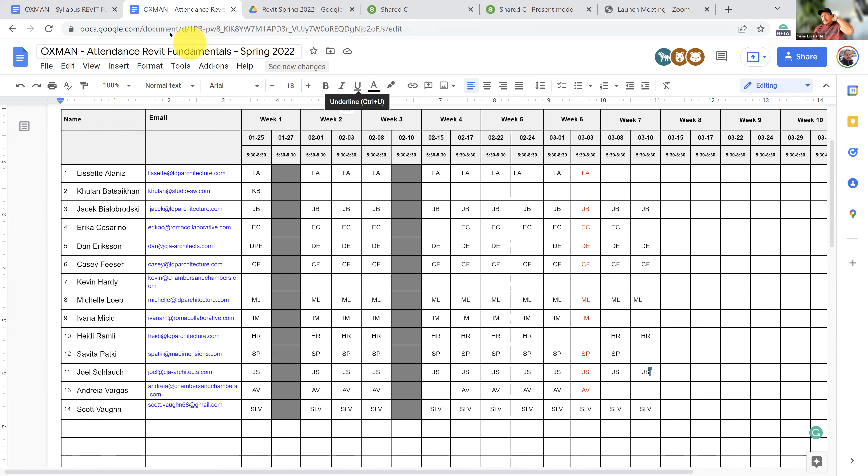So last class, we looked at shared coordinates, a very detailed discussion on shared coordinates. Today, I'm a little behind schedule, but we're going to cover parameter schedules, rooms, and color schemes. Next class, I'm going to try to catch up quickly, because working with CAD export interoperability is going to go very, very fast. And I think on the drafting view, we already covered some of this.

The class I recommend not to miss is phasing and design options. This is a good topic, in particular when we're trying to structure renovation projects, which I assume a lot of you do at your practice. And sheet and detail management is more about BIM management, things to be aware of when working with consultants or with owners that demand BIM, and some of the contractual requirements of drawing deliverables and organization.

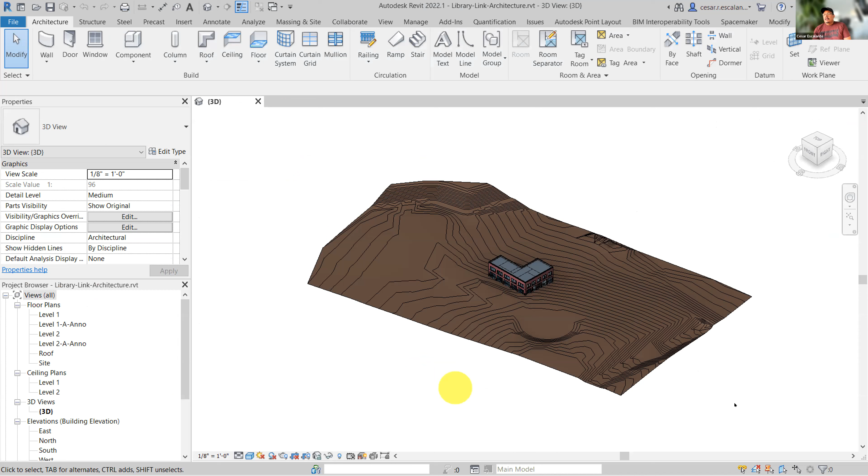All right, so for today, I'll do a little recap of the shared coordinates, and then we're going to jump into a quick test. This is where we left the last class. We were able to establish shared coordinates with a site. Just to remind the process: shared coordinates is a setup that happens once in the life cycle of a project. Usually the BIM manager helps start this process before a project kicks in.

The process is made of 4 steps. We discuss with Civil to determine the shared coordinate system, and we align the survey point to a point agreed with Civil, usually an intersection of a road or the corner of a boundary, some property lines. Then we can derive a topography. We create a topography based on a CAD file. There was an extra topic there.

Then we link this source into all the consultant files. And then the linked file is moved, rotated and aligned to your project. You never move your project to the link location. You move the link to your project. And then we acquire shared coordinates. And that's where we ended up last time.

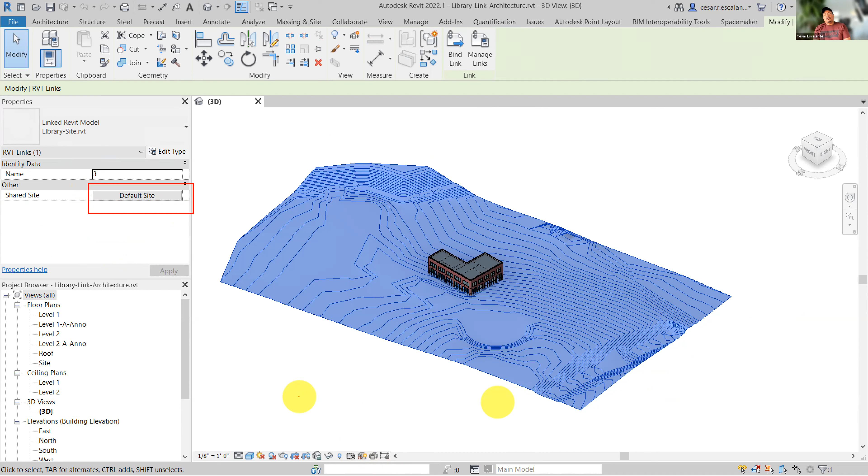Okay, so when shared coordinates are established, I could remove this link. Say, for example, you have a landscape architect or a civil architect, and they're sending you a new copy of the civil information. Then all you need to do is to reload the link using shared coordinates. So you don't have to do this, but let's pretend that Civil sent an updated civil drawing, or the landscape sent us an updated landscape model. All we need to do moving forward is to relink the file.

I'm going to add that. Oh gosh, where was it? I think I was using the D drive. Shared coordinates. Site's not here. Let me find it.

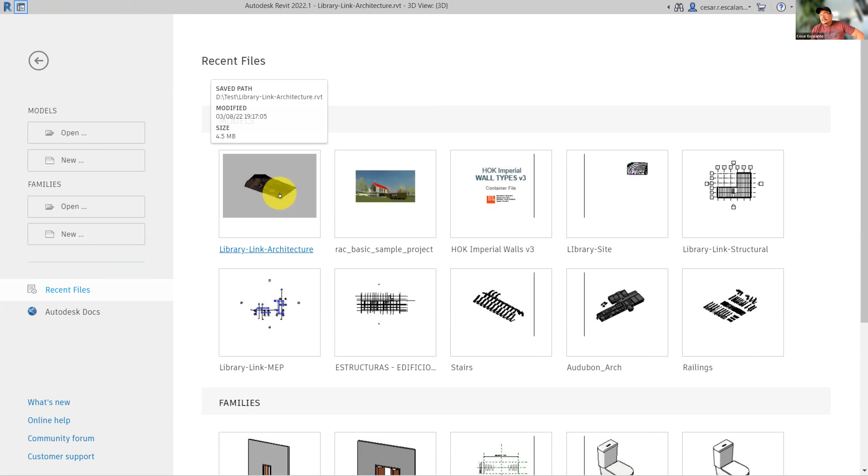This is a quick tip. If you want to know where the last file you were, you just switch to the welcome screen and hover over a file. It will take you where it is. It was under D test. You hover over and it will disclose the path for you.

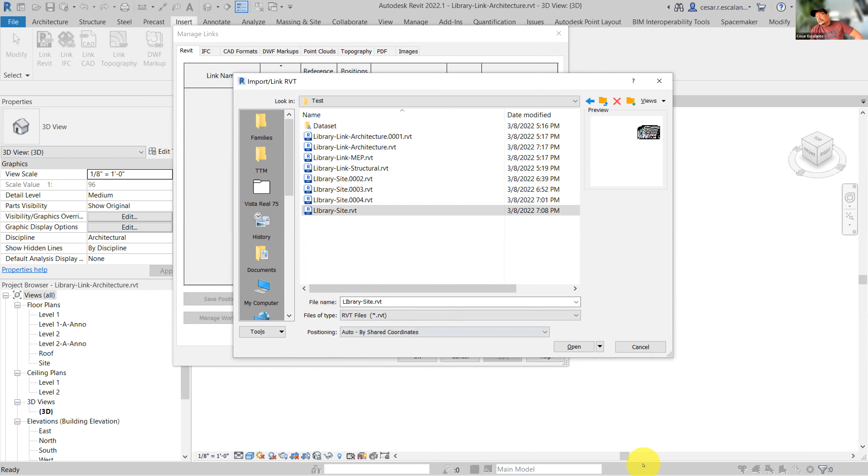Okay, so if I want to reload a new version of the link, you just go under Manage Links, Add, and I'm going to go to D test. Here is the site. And from this point forward, you always use By Shared Coordinates because the shared coordinates are already established. And so hit OK. And this should fall exactly in the same spot. Moving forward, these two files will be aligned and they will not shift unless somebody manually does that.

I would recommend you to pin every link so that it doesn't get moved by mistake. When you pin something, the link cannot be dragged out. If a model with established shared coordinates is dragged out, check what happens. If you were in the middle of modeling and suddenly you by mistake drag a link, and this link has established shared coordinates, you're going to receive this message.

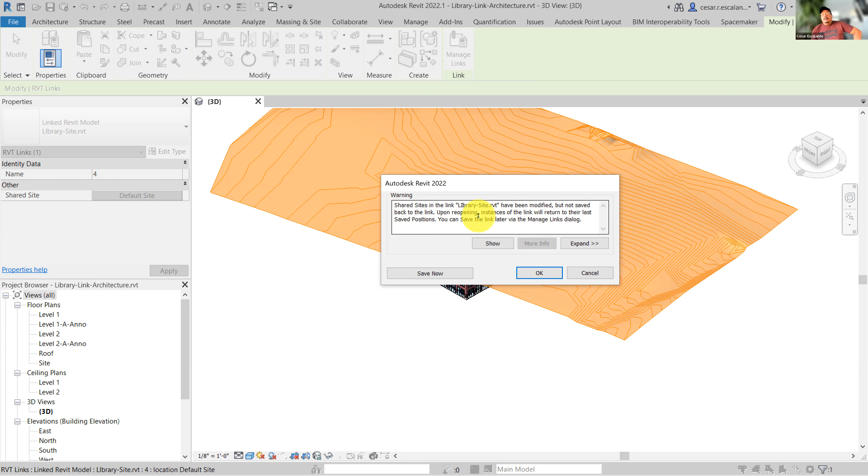It's a warning saying that the shared sites, which means the shared coordinates of the library, have been modified but have not been saved back to the link. Upon reopening, instances of the link will return to the last saved positions. You can save the link later via the Manage Links dialog. This warning is really a bad warning, because what Revit is telling you is that right now there is an uncoordinated location of shared coordinates, and Revit is attempting to alleviate this coordination.

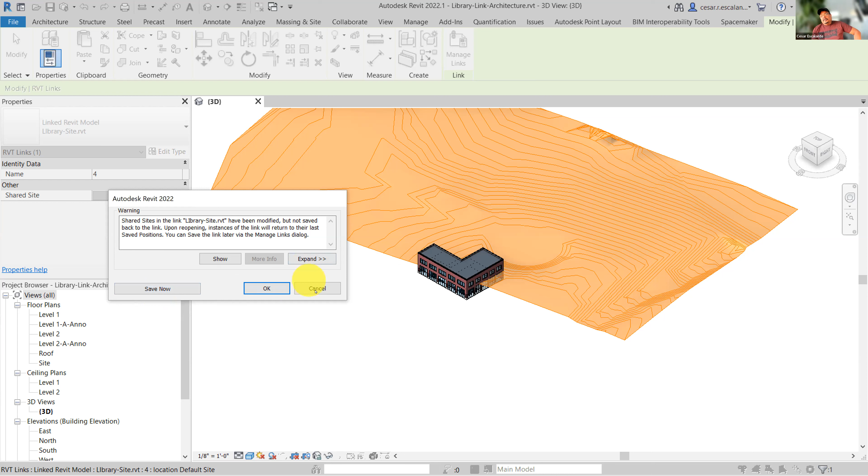And so if you're presented with this dialog box and you click Save Now, what you're actually doing is publishing the architectural shared point into the link, and modifying the link location. So I think this is the only dialog box where saving is bad. If you save here, we will be modifying the location of the shared coordinate system in the link, and that's not a good practice. That's gonna mess up the shared coordinates. So if you ever come across this message, always hit cancel. Cancel is gonna return the link to the coordinated place.

Now, to avoid that message appearing, just pin the link and then no one will be able to change or move the link inadvertently.

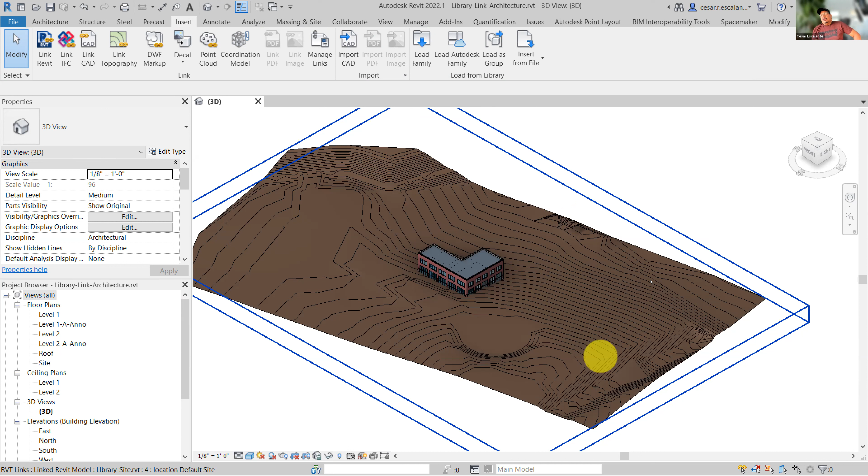Then the next step is to link this model into structural, establish shared coordinates, and repeat the process. Then you do that with every discipline, and you will be able to cross-link discipline with discipline using shared coordinates. After the structural establishes shared coordinates with the site, you can link the structural and the architectural using shared coordinates. And the whole system should be using the same thing.

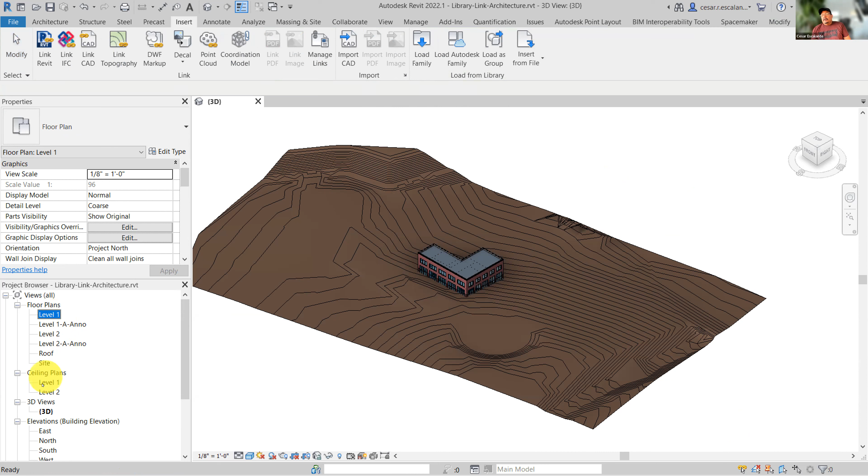The shared coordinates must be documented in the project execution plan. It's one of those pieces of information that must be disclosed and shared in one of the chapters of the execution plan. Usually what you want to capture is where the shared coordinate sits, in this case here, and what is the value of the project base point.

The project base point typically sits at the intersection of a grid, and it's usually the one that holds the elevation, an alternate coordinate for the elevation. So the last thing I'm going to do is move the project base point to an intersection, and that should do it.

Yesterday, who asked me? I think it was Dan, or it might be you, Joel, asked me, how do we relocate a project? Like if we needed to move an entire building by a certain distance because, I don't know, maybe it's overlapping a setback or on top of a property boundary, then the way to do this is using Relocate Project.

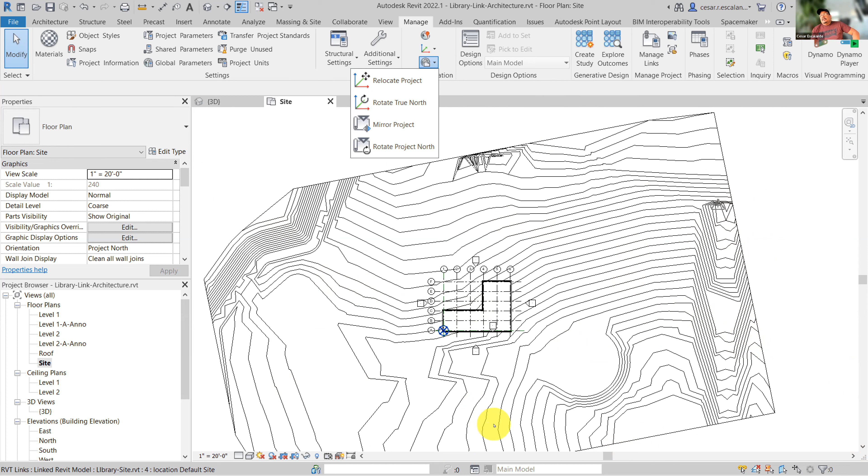So Relocate Project shifts the entire world except the links with shared coordinates. Everything, the elevations, the views, the 3D model, the project base point, the insertion point, everything moves except the shared coordinate point and links that have shared coordinates. So if I need to relocate this by a certain distance, you go to the Manage tab, then go to the Position drop-down list, and there's a button called Relocate Project.

You select a handle. This is where you move the building from, and then you select a destination point. So if I need to move the whole thing 5 feet, I'll do that. And notice that everything moved except the link file. I'm going to do it again, but maybe I'll do it more.

So again, I go to Relocate Project. You pick a source point, a destination point, and notice how the link remains in the back. Everything that has shared coordinates will remain where it is. And this operation of relocating a project needs to be done by every consultant so that we don't miss an alignment there.

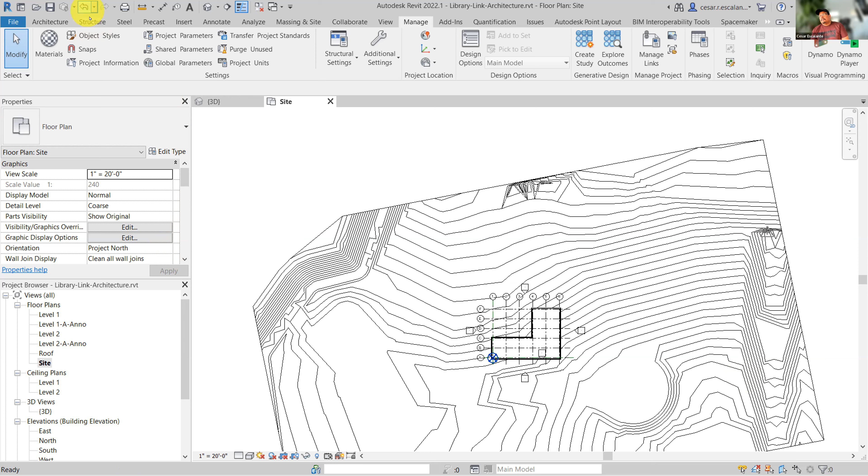Okay. So that is it for shared coordinates. Any question about this? Okay, so I'm going to close this file.

And it's time to do a little test. All right, you know how to do this. You go to slido.com and enter the number 509857. This is all a shared coordinates test. So if you paid attention in the last class, everything should be straightforward. All right, we're ready. Now launch question 1. You have 7 people on the test. Nine. All right, I think we all are here.

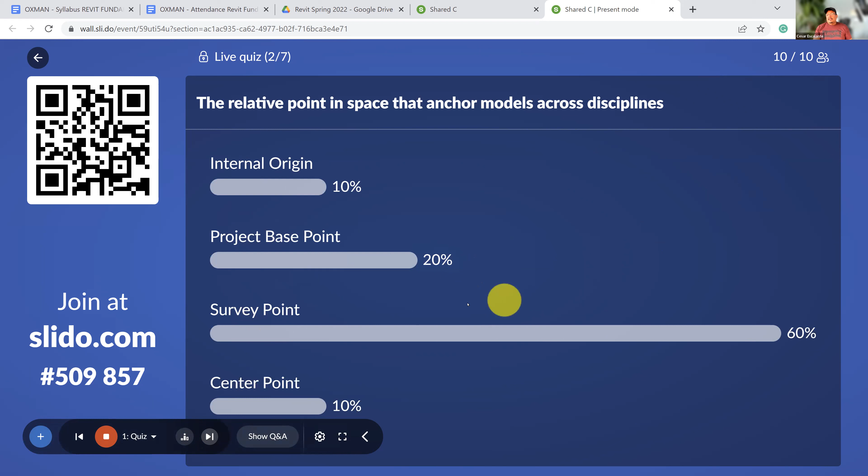The survey point, which has the shape of a triangle, is the point that establishes shared coordinates, and is the point that anchors models across disciplines. Project base point is just a secondary coordinate system. Center point is the geometrical center. All right. Casey got this correct. Good job, Casey, Erika, and Michelle.

All right, next question. It's all about the points. A relative point that allows levels to report a different elevation. Is it the internal origin? Is it the project base point, the survey point, or the center point? So remember, levels can report elevations relative to the ground level or elevations relative to sea level. So there's one point that enables us to do that.

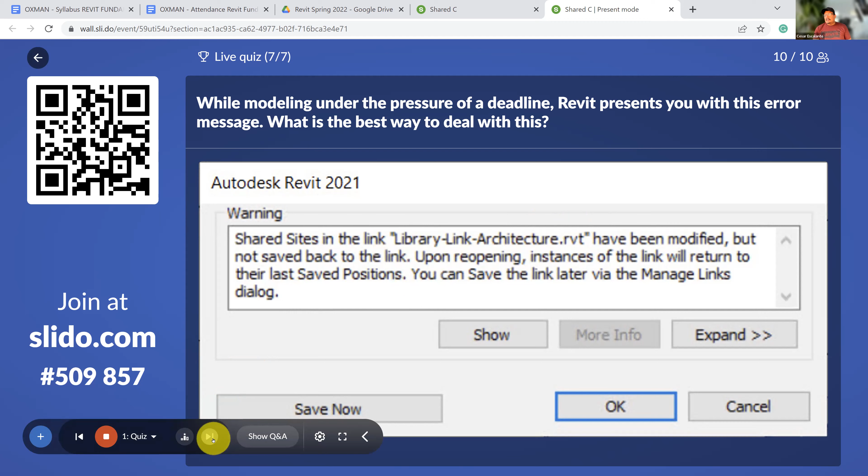Okay. Yes, everybody except one person got it correct. We always hit cancel because if we click save now, we're going to be publishing the shared coordinates into the link file, and that's a no-no. If you hit OK, you're basically ignoring it. But then when you click save, the same message is gonna pop up, so you're not addressing the issue. Every time you synchronize with Central, this message will be popping up again.

Okay, so the winner of this challenge is Ivana. Do I get a prize? Yes, so you did 6 of 7. And this was the hardest question in the test. I don't know what it says here. Oh, here. The point in Revit that indicates the center of space. Yeah, that was tricky because I mentioned the center and everybody picked center point.

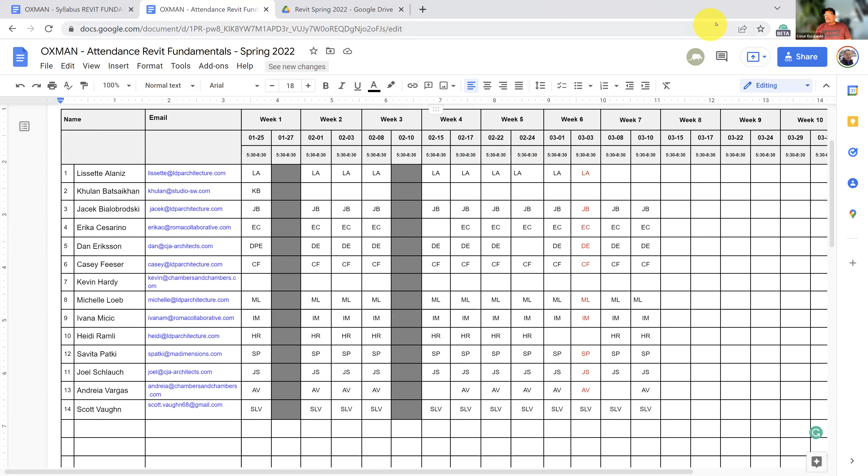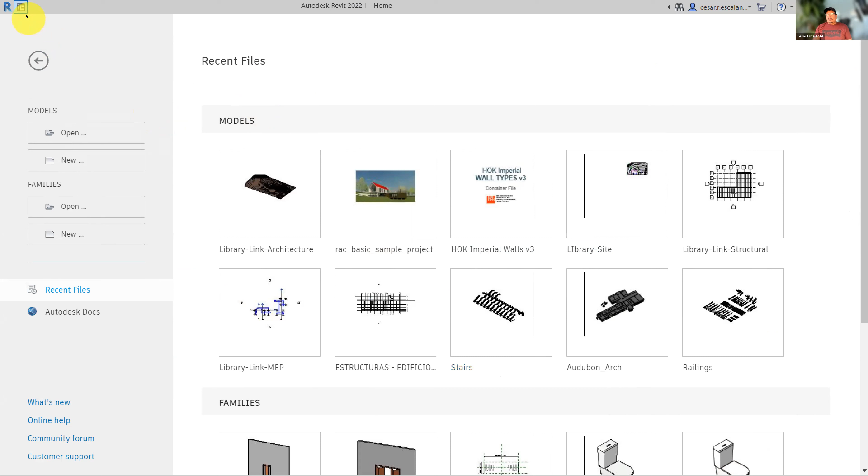All right, so we're going to talk about parameters and shared parameters. And for that, I'm going to open an out-of-the-box file. I know a couple of you have issues with this sample content, but let's see if this file is on everybody's workstation. So hit the home button, which is the button next to the big R, and that displays the Revit UI.

The reason I'm doing this is because under the File tab, if you just hover over Open, don't click on Open, just hover to display the drop-down menu, and scroll down, you're gonna get to the sample files. Inside the sample files, you should find the RAC Advanced Sample Project. Don't pick the RST or the RME, that's Revit Structure and Revit MEP. What we want is the Revit Architecture Advanced Sample Project.

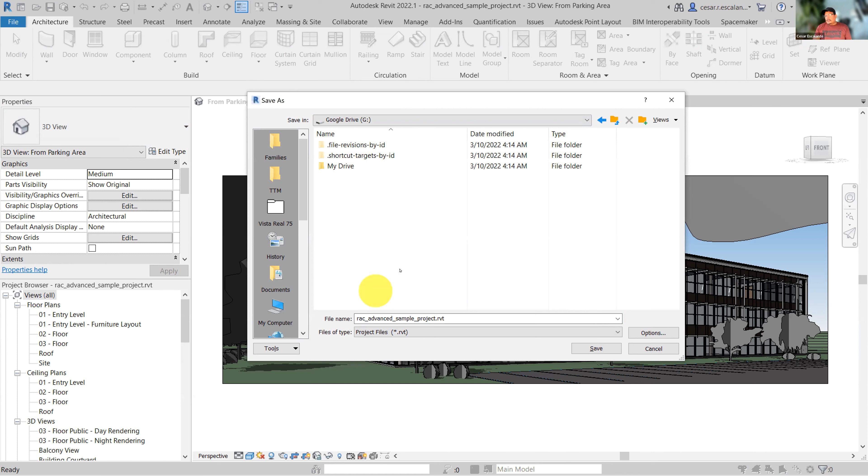And then hit OK. I only have the RAC basic sample project. Oh, is that right? Yes, sir. Okay, so I'm going to save this file in the Google Drive, and then I'm going to put a link. Save as a project under the Google Drive. I'm going to put it under documentation, and this is the RAC Advanced Sample Project. And I'm going to share the link in a second. Excellent.

Another thing I'm going to do: I have a 4K display that's making my things go nuts, so I'm going to return this to 1920 by 1080. Stop sharing and reshare again.

Oh, Ivana, remember last time you were having issues with the color of the object styles? I forgot to ask you if you have a 4K display. I have no idea. Because usually high resolution monitors display that problem, in particular with the colors. And so it's a bug. I think it's been reported. But there was nothing wrong on your end. It's a Revit bug of behaving in high resolution. Oh, okay. That's possible. Yeah. In particular, the better the graphics card, the higher the resolution you can display. So that's probably what was happening.

Okay, so I placed a link to the file, and this is a 3-story school in, I don't know, I think it was in Germany. Autodesk acquired the rights to use these data sets some time ago. But this is just for people who don't have the sample file. Yeah, this is the link. But if you have it, you're fine. All right.

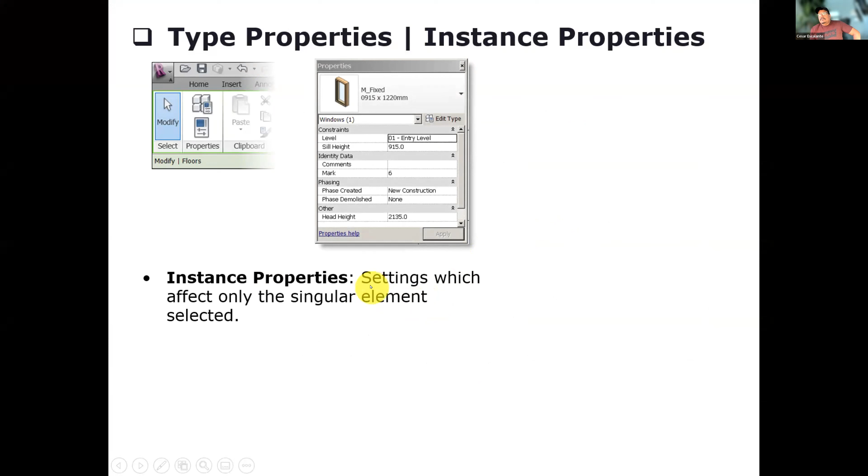Okay. So we're going to talk about parameters. Let me pull one slide up. And this is just a refresher. We know this already. The instance properties of an object are properties that are unique to an object. And the type properties are parameters or properties that are common to every element belonging to the same type. So this is going to be in the test next Thursday. And we know this already. You know what a type property is and an instance property.

When you select an object, everything that is displayed on the properties window, that is an instance property. And then to access the type properties, you click the Edit Type button, and that's going to display all the common parameters of that type. If you change the type property, it's going to change it for all the elements that are present in the project.

And so when we're talking about creating custom information, we're talking about adding additional pieces of information to Revit materials, Revit objects or Revit assemblies. And when we add a parameter, we need to choose what type of information it is going to convey. Revit has different types of information. At the base level, it has dimensional values. For example, the height of this window is 4 and the sill is 3 and the width is 3. And so these are dimensional values, and the cell that holds this value is formatted to report that kind of units.

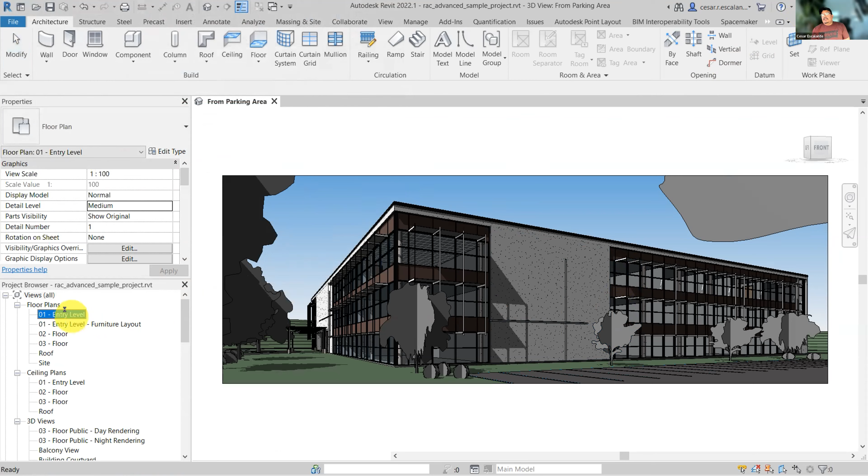Okay, all right, so going back to the project, you have this open, right? I'm going to switch to the entry level, the floor plan entry level. And I'm going to explore some properties of the doors. I select any door in the project. I'm going to stack this here on the side.

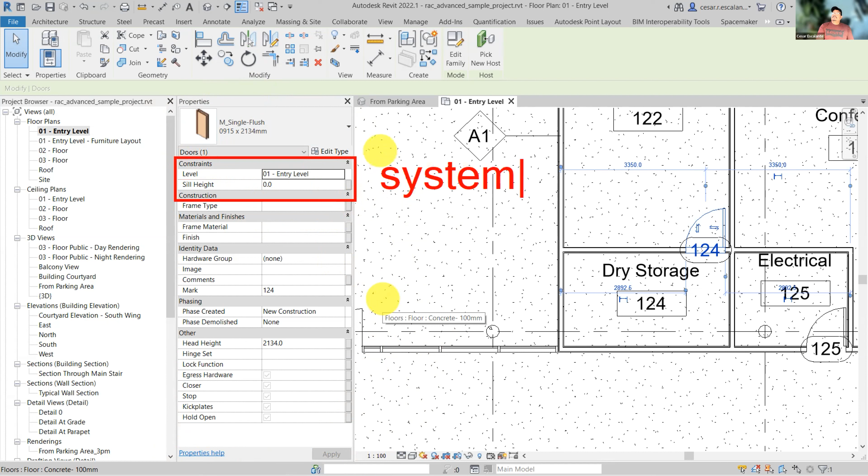The information reported by the instance properties includes system parameters, and these are out of the box, and these are category specific. So that means that every door created in Revit, by definition, is going to have those types of parameters. These parameters, you cannot create them, you cannot delete them. They are just what they are. System parameters are category specific, and they are out of the box.

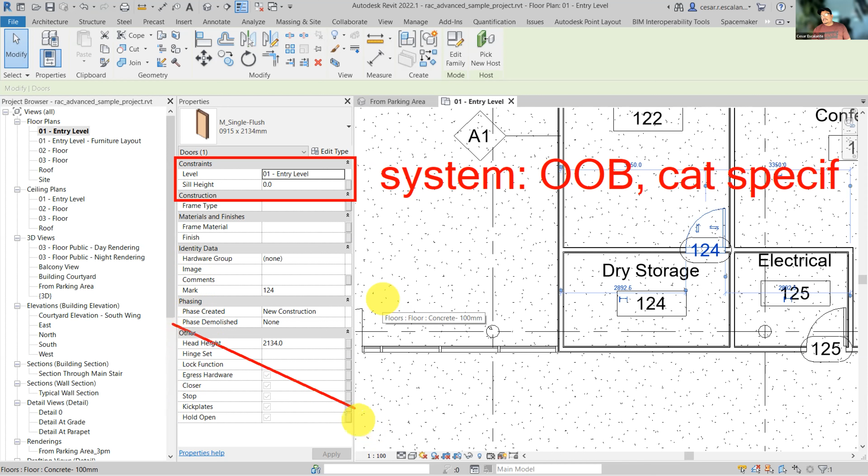We have also multi-category parameters, which are parameters that are common across multiple types, multiple instances, multiple families. In the type properties, for example, a lot of the properties that live under the identity data are multi-category. An example is Keynote, Model, Manufacturer. These are multi-category because more than one category has them. The same parameter exists across multiple categories.

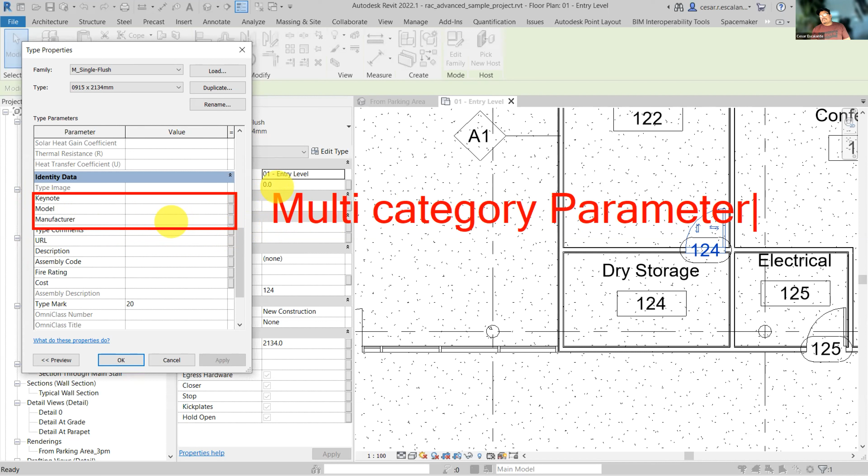And then we have another type of parameter, which is kind of unique. This is called a schedule key. A schedule key is a value that acts as a key for another database. So this parameter called hardware is a parameter that is predefined with a set of values. Right now it says none, but you can configure a hardware group to have 10 different numbers. And then the value that you place here automatically associates a combination of parameters at the bottom of all the instance properties.

And so these parameters, the value of these parameters are driven by a key. And this is useful when you're doing hardware groups, or when you're doing room styles or finish styles. In the case of rooms, for example, if you have a room style type A, then that comes with a predefined set of finish types. So it's a way to connect Revit with a new set of predefined combinations of values. Does that make sense?

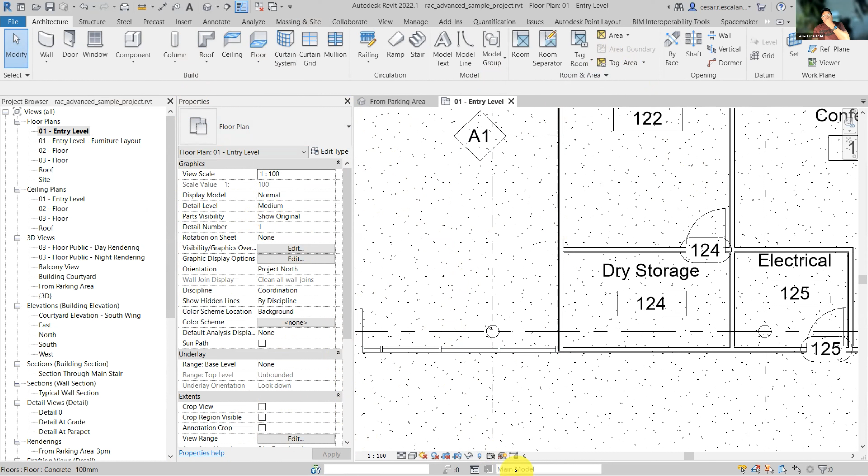So when we create a custom parameter, we need to make decisions about what that parameter is going to report and what category it's going to get associated with. Let's add one parameter here. Let's add a checkbox that defines whether something is in scope or not. Sometimes models have that parameter to indicate to the designer or the contractor whether something is in scope or not. And so if I want to have that custom parameter living as an instance inside a project, I must create a new custom parameter. So let's do it together. To create a custom parameter, you go to the Manage tab, and then you hit Project Parameters.

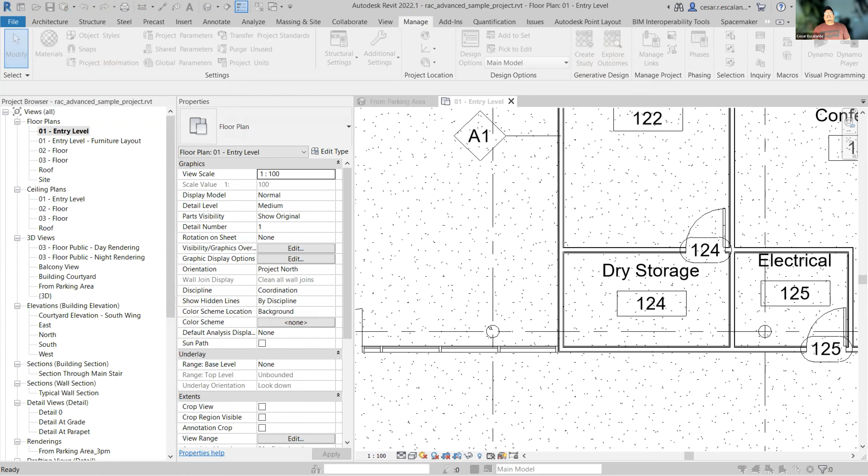Let me disable this. I hate this. I don't like the help, so I'm going to disable it here. Tooltip assistance, none. And I'm going to disable the selection by face.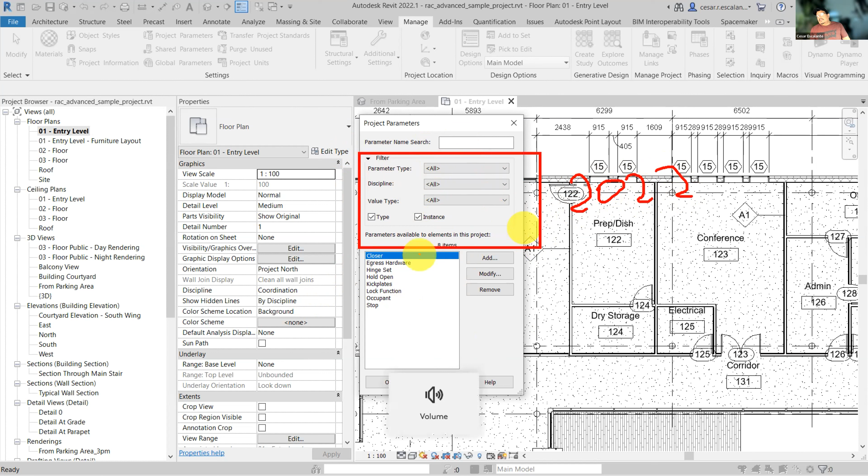Okay, so again, to create a new parameter, you go to the Manage tab, and then you hit Project Parameters. And this is a list of the parameters already created for this particular project. In Revit 2022, they added this filter. In bigger projects, in particular multimillion-dollar scope projects, the list of project parameters can be long and extensive. This is new in Revit 2022: the ability to filter the list of displayed parameters by type, by discipline, or by value. You can also search a parameter.

So if this list was very, very long and you want to identify which are project parameters or shared parameters, which I'm going to talk about in a little bit, you can do that now. This project doesn't have any shared parameters. You can sort parameters by discipline. A discipline is a property of a parameter. On the architecture side, we always use the common discipline. And then the value type, this is the name of the parameter. This is a list of all the different types of parameters.

And so these are actually units and content type. Like if you just want to see parameters that report area units or that display perimeters. So this is a way to continue filtering information by value types. So I'm going to display all right now. This is a way to select with our type parameters, with our instance parameter.

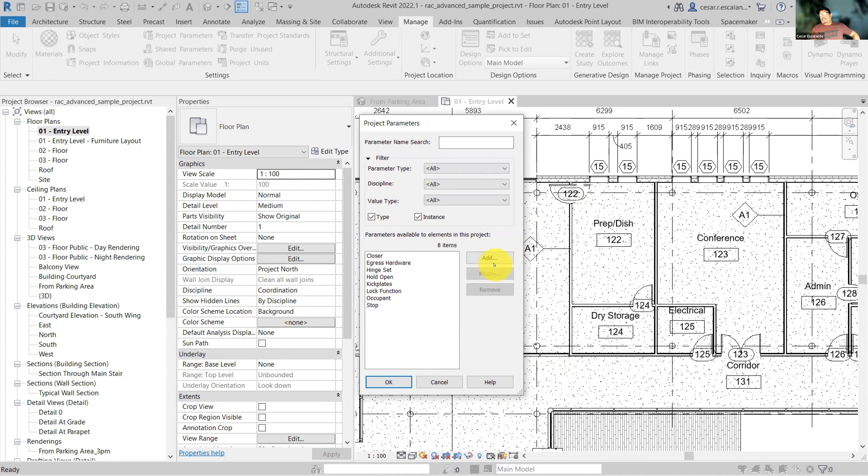Okay, but we're going to create a new parameter that is called in scope. And it's a checkbox associated with the doors. And so that information doesn't ship out of the box, but we're going to add a new parameter. And notice there are two types of parameters, project parameters and shared parameters. Right now, I'm talking about project parameters. In a bit, I'm going to talk about shared parameters.

So the name of the parameter, it's called in scope of work and a question mark. It's going to be an instance parameter because every door is going to have a separate unit. And I'm going to associate it to the category of doors. And the type of parameter, it's yes, no, that is a checkbox.

But look at all the different type of parameters. You can report text, integers, angle, area, cost, length, dimensions, density, rotation, speed, time, volume, blah, blah, blah. This is the type of cell format holding the parameter value. So when I select this yes, no, that means it's a Boolean, that's a checkbox.

Yes. And then group parameter, it's under what group you want that to be displayed. A group is all these headers with a gray background. That group parameter is at an instance or a type level. And so for my purposes, I'm going to say other. You can add tooltip descriptions if you want. These are like instructions for somebody who's filling out the information. And then I'm going to say, okay.

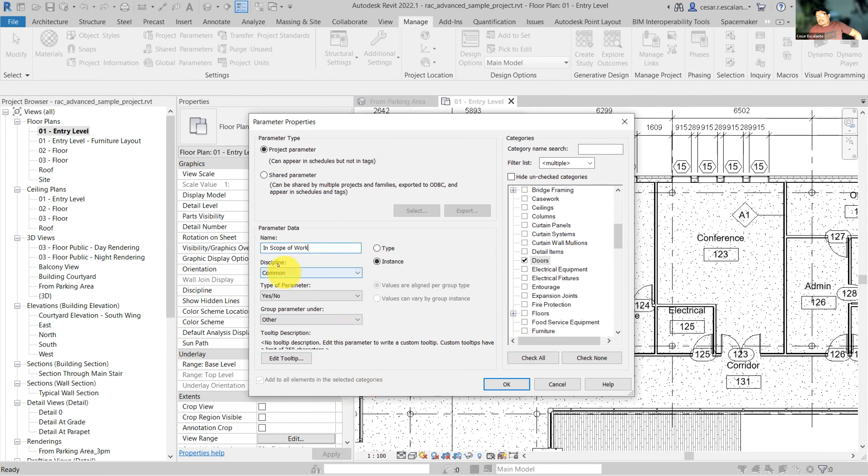Oh, I cannot have question mark. So I'm just going to say, is it in scope of work? That's it. And then I hit OK. And now every time I select a door, I'm going to see a new parameter at the very bottom. It says in scope of work, and you can click or unclick. And so you can selectively include doors that are in scope of work. Maybe some doors are not in scope of work, and then you can filter. You can use this checkbox as a filter to create your schedules.

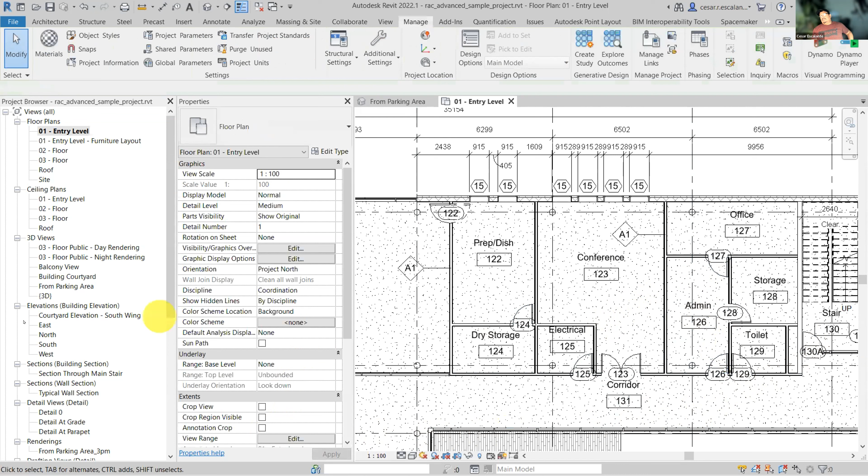So is the default yes? The default is yes. This was grayed out. That means it is yes. The default is yes. Like this one, you see how that by default is yes. So you have to go back and clean it. But you can select multiple doors at a time and change in bulk that value. Okay, and this added that piece of information to all the doors.

That was adding a project parameter. And so a project parameter is a parameter that lives inside a Revit project. And so a project parameter can be scheduled and can be tagged. No, it cannot be tagged. The values of a project parameter can be made part of a schedule, but they cannot be tagged. This is tagging a parameter like this. The door mark value is a parameter that can be tagged, but project parameters cannot be tagged. That's one of the limitations.

And so if we need our custom information to be able to be tagged, then we need to use shared parameters. A shared parameter is a parameter that is retrieved from a file of attributes that is defined by a company standard. In other words, a shared parameter is a parameter that we don't create from scratch, but that we retrieve from a dictionary of parameters. And this dictionary of parameters is a file that is typically stored at a centralized location in a company server with the purpose of being used as a repository of company parameter standards.

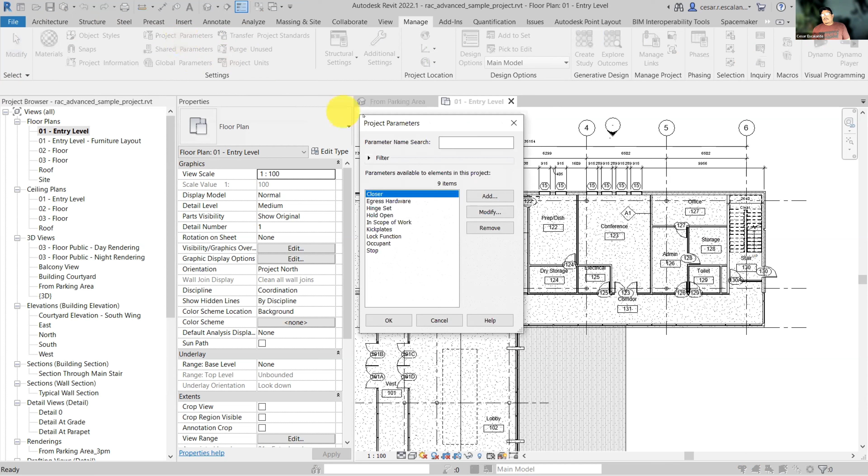When we create a new project parameter and we add a new parameter, you have the choice to leave it at the project level. And you actually can see here that it says the value will appear in schedules, but it's not going to appear in tags. So if you need that value to be embedded in tags, then it must be a shared parameter.

The other advantage of using shared parameters is that they can be used across multiple projects. And information coming from multiple projects will stack in a shared schedule. When we create a schedule, we can aggregate linked parameters, and they will be displayed in a single schedule.

So when you select the shared parameters, then you have to go and find that dictionary of values. So let me pick an example of a shared parameter. I think I might have one here. Give me a second.

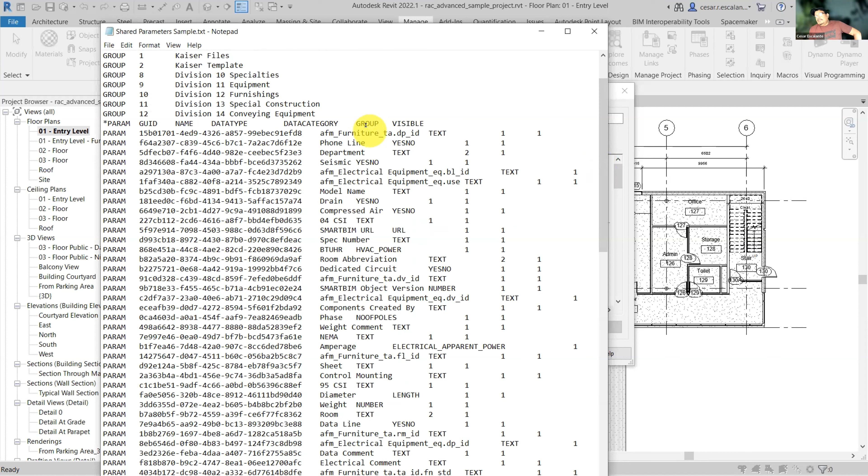Okay, this is an example of a shared parameter file from a company I used to work. And this is the dictionary of parameter types. They are segregated by group, and you can retrieve information about the name of the parameter, the data format that they will report, and whether the parameter is visible or not.

And the most important part of a shared parameter file is this big character here. This is called the GUID number. GUID equals global unique identifier. And this is in the test next week. A global unique identifier is how Revit processes a parameter. Revit doesn't care about the name, the format, anything. They care about the GUID number.

And so for multiple files to have a parameter that can be scheduled across, you need to use a parameter with the same GUID number. In other words, if I create a custom parameter, say fire rating, and I'm creating a door schedule across multiple files that includes linked information, the only way that the fire rating is going to be able to stack in a single unified schedule is if it was a shared parameter and all the files share the same GUID number.

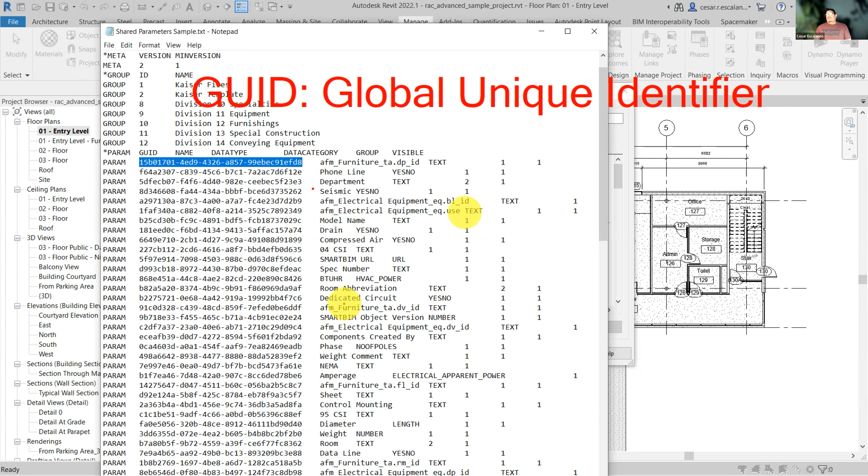So when you use a shared parameter, you actually go and use this text file, retrieve a parameter, and then assign a GUID number that would enable you to tag it and schedule. All right, so we're going to create a new shared parameter, and we're going to create a new shared parameter file. So for this project, I'm going to create a new parameter for the walls that indicates if it's a smoke partition or not.

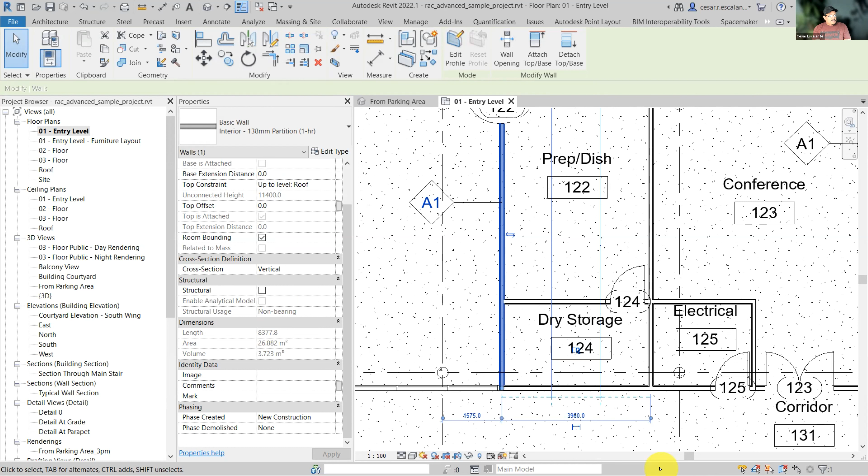Or no, the value for the acoustic properties is called SCA, is that right? What's the name? STC. Sound transmission class, STC. That's correct. ARE question. Okay, so there's not a type property that is called STC. And maybe that's information we want to include in our partition types and partition schedules.

It's going to be a type parameter, and it's going to be a shared parameter because I want it to be a company standard. And also, if you want to extract that information in schedules across multiple projects, all of them have to use the same GUID number. So I'm going to create a new shared parameter file, and then add a new parameter for walls called STC, and retrieve it from the shared parameter file. This first step may be skipped if you already have a shared parameter file, but if you don't have a company one, maybe this is useful for you.

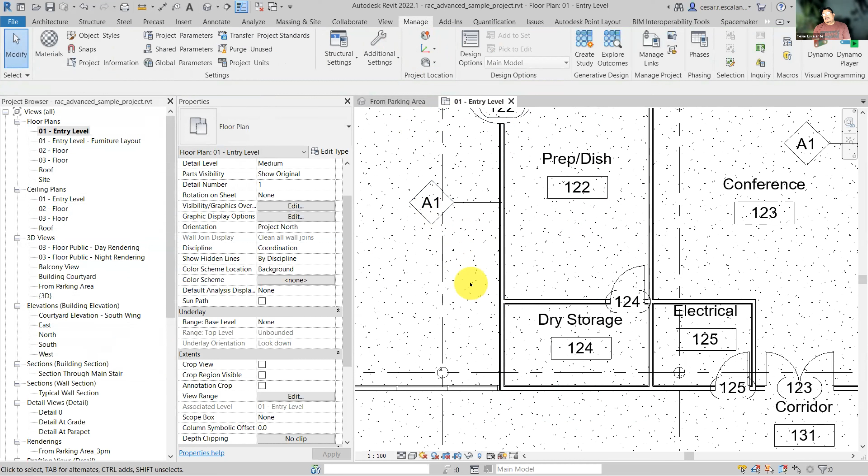Go to the Manage tab and then click Shared Parameters. I'm not sure you have anything connected to your shared parameters, but what I'm going to do is create a new shared parameter file. So on the upper right side, again, go to the Manage tab, hit Shared Parameters, and we're going to create a new shared parameter file. The shared parameter file is a TXT file.

And I'm going to place it on my test folder. You can find a location to place this on your end. I'm going to put it on this custom folder. And then I'm going to call this shared parameters. And then I click Save.

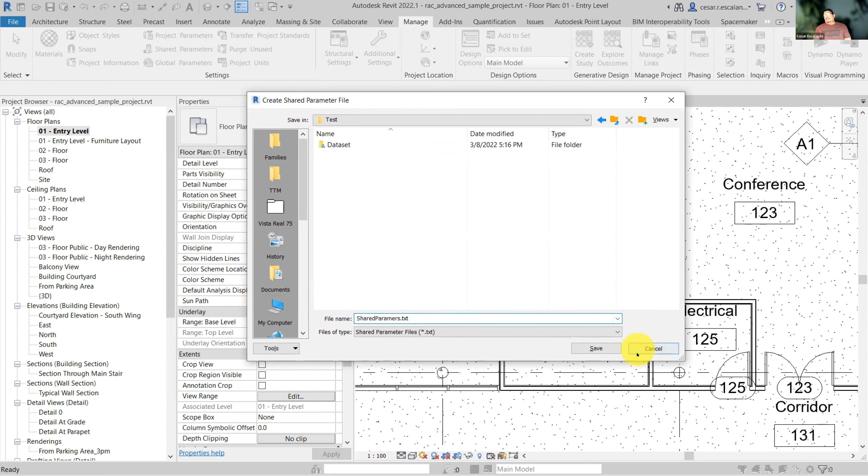So when you create a shared parameter file from scratch, at the start of the process, there's no parameter. It's an empty file, and it's a file with the extension TXT. And so the first thing you have to do is to segregate, or create parameter groups. There's no parameter groups here, and without parameter groups, you cannot create a parameter. So I'm going to create a new group. A group is a way to organize the parameters.

So my new group, you hit New here. I'm going to call this wall parameter. No, just maybe partition. Partitions. And so under the group of partitions, I can now create a parameter. You create a new parameter here. The name is STC rating. And what discipline this belongs to: 99% of what you do is going to be common.

What type of information is it going to report? What do you think? STC ratings are numerical values with decimals, is that right? And so most likely you want to report a number. Or you can do it as a text if you want to. Text will allow you to combine all types of characters. Let's do text. And then you hit OK here. So this is my first parameter in my shared parameter file, and I can continue adding more parameters.

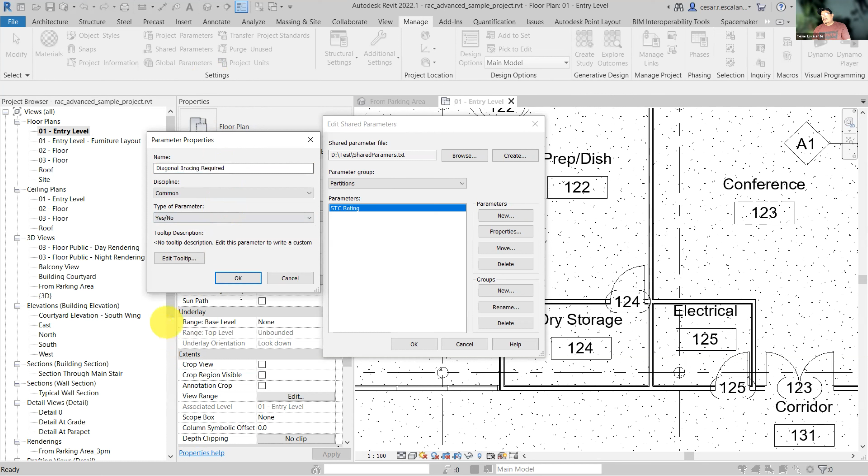And so you keep adding the list of information that is important for your documentation but is not provided with Revit out of the box. These are parameters that are going to be associated with partitions. And so forth you do for different parameter groups. You can create a group for specialty equipment or for medical equipment, and then you add all the parameters with the values and formats associated with the client requirements. I'm not going to create more. I'm just going to add these two parameters, and then this parameter file, if it's a company standard, must be placed in a central location.

Now, only a handful of people should be able to create parameters, because it's a big deal. It's defining what information is important for your project. So usually BIM managers just give read-only access to this text file, and then if a user requires specific information, they edit it for you. This is true in particular for large organizations. In small practices, if you have a Revit savvy person who knows what they're doing, then you can allow them to edit or add a parameter. So this is how we build a shared parameter file. So I'm going to hit OK here.

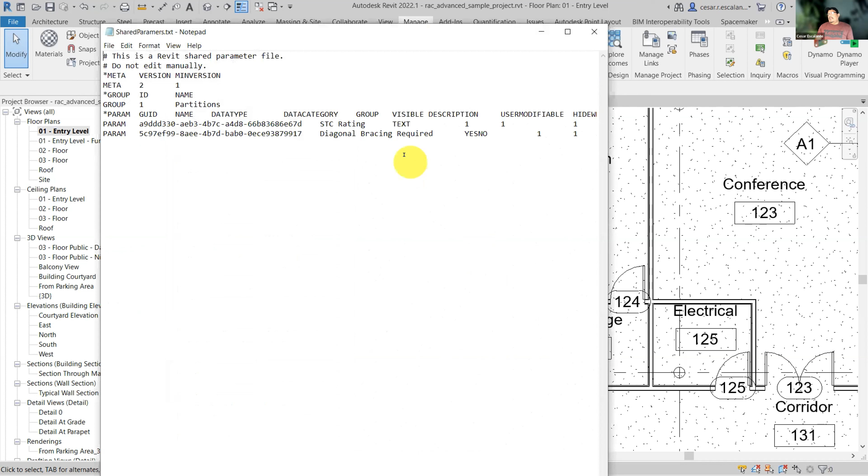And so that we understand what's happening in the background, I'm going to go and open that file. So in that TXT file that I just created, this is what's happening. The first line is very clear: this is the shared parameter file. And the second line says, do not edit manually. If we by chance edit any of these values, then the parameter becomes unusable. And so STC rating is the name of the parameter. It's reporting text information.

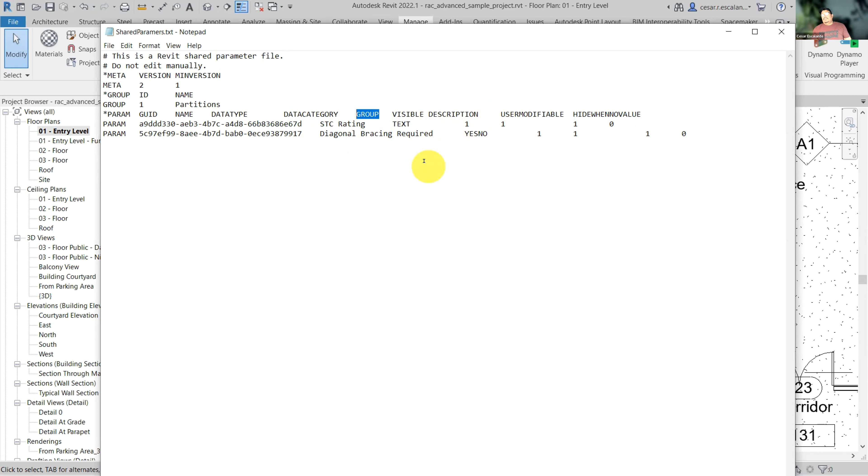The next is the data type. There's a numerical nomenclature associated with the type of information it reports. Text is number one, but if you put number, angle, weight, speed, then it's going to have a different numerical value. Group: there's a number associated with the group inside the shared parameter file. Visible: whether it's going to be disclosed in the properties or not. Description, if you added one, and then I don't know what these last two mean.

User modifiable, that means that it can be edited by anyone, and then hide when there's no value. That means, not sure exactly how you control that. But anyway, this is the shared parameter file, and this is going to continue growing, just like the sample file I showed you. But the most important part here is the GUID number, the globally unique identifier.

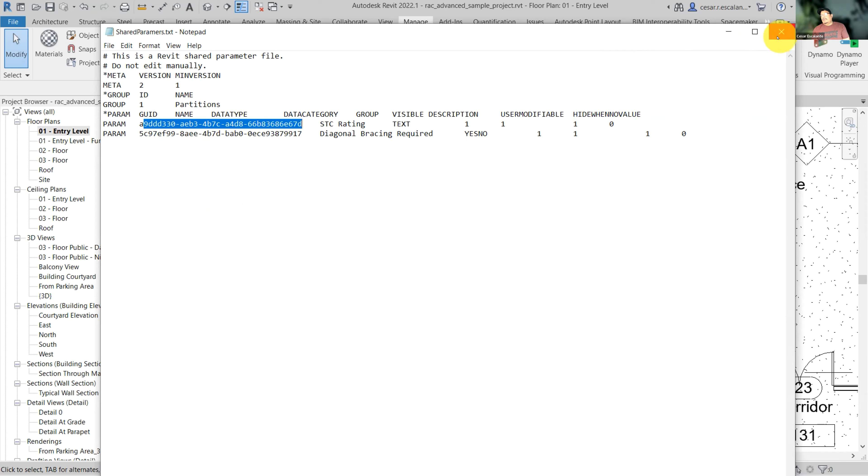All right, so we're going to add the STC rating to the walls. So what you do is go to the Manage tab and create a project parameter.

We're going to add a new parameter. And then we're going to click Shared Parameter. I have to select a new shared parameter file. And you should be connected to the new shared parameter file that we created with only 2 parameters. If you're missing the path, you can always hit here, edit, and then browse and look for that text file. But that shouldn't be happening, because when we create a shared parameter file, it automatically saves the path with it.

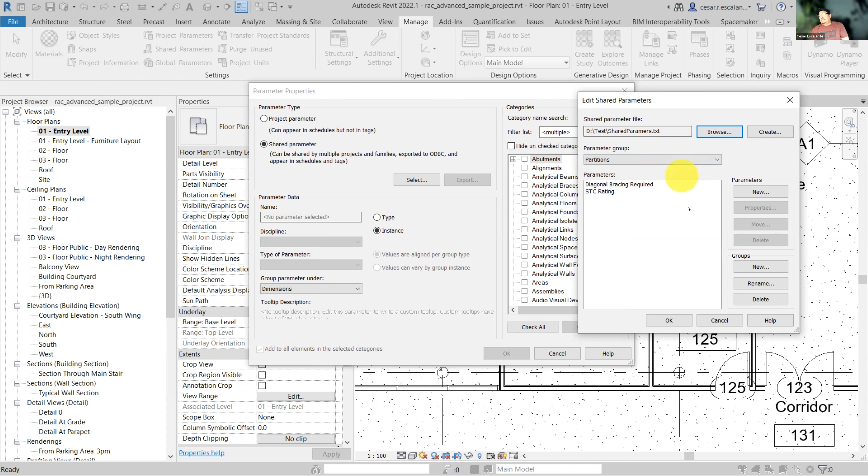Okay, so I'm going to select the STC rating. Then I hit OK. Select the STC rating from this list and then hit OK. And so what happens, look at this parameter information, it's filled out automatically because that information is coming from the dictionary. You don't have the ability to change that. Revit filled this information for us so that it's consistent from project to project.

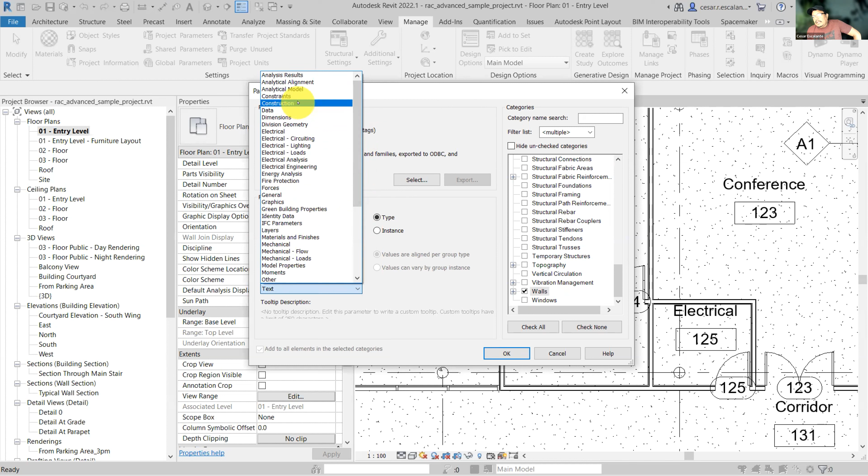Okay, this is going to be a type property associated with the category of walls. Every type is going to have an STC designation. And I'm going to group this parameter under, you can pick something here that makes sense for the walls. STC, it's a property that displays maybe the construction, either construction or identity data. This is where in the list of parameters this is going to sit. All right, you with me here? Then I hit OK. Hit OK.

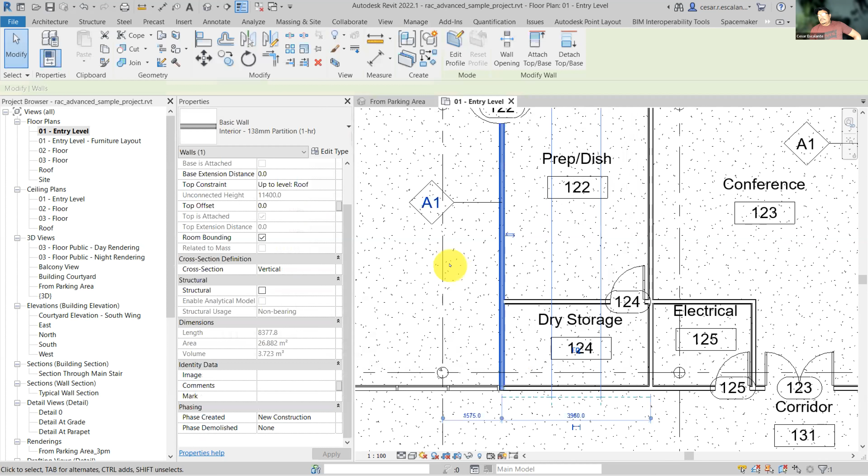And now since it's a type parameter, if I select this wall and I look at the type parameters, under the construction parameters, you're going to see the STC rating. You can add here the value. I don't know, maybe it's 32. It's a type parameter, so every interior partition that's 1 hour is going to have that STC rating. And I apply it, and every time you see this partition, the STC rating will be there.

And so the bottom line here is to understand 2 things. Project parameters are created just for an individual file. They can be scheduled, but you cannot tag them. Shared parameters are retrieved from a shared parameter file. They should be used across multiple files. You can tag and schedule a shared parameter, and it comes pre-loaded with parameter definitions. All you need to do is to assign it to a category.

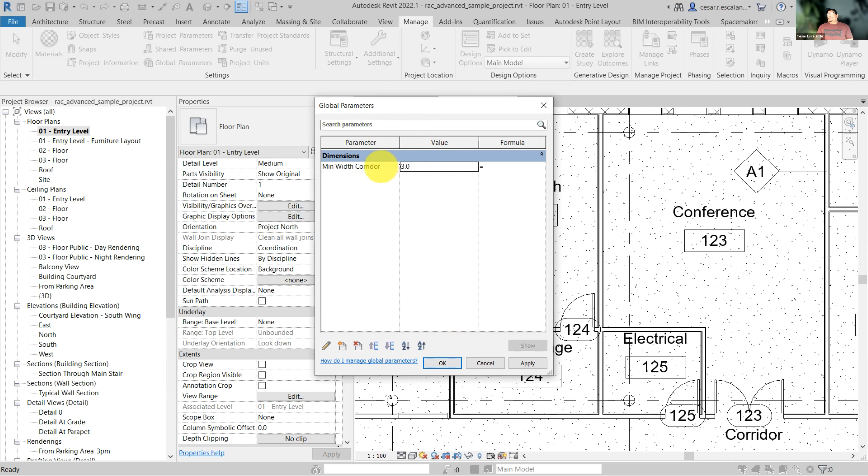Okay, and then another global parameter is countertop height or ADA height. And so those pieces of information can be added to formulas, and Revit automatically is going to know what that is. It doesn't necessarily need to contain numerical values; it can also be text information. For example, project address, or subconsultant name or subconsultant address. These are parameters that you can pull. This is a database of values that can be brought into formulas if needed.

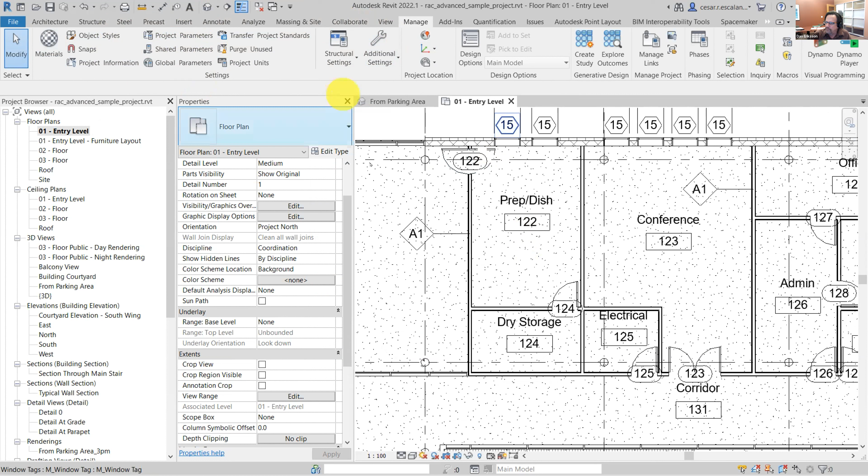Okay, but my point here was the difference between project parameters and shared parameters. So, any question about this? You want me to repeat anything I did? I've got one question. Back in type properties, the STC rating is reporting 32 with about 6 zeros. You wouldn't want that in a schedule if it showed up. Is there a way to get rid of all the decimal points? Is that an easy thing to do, or is that possible? I guess. Yeah.

Let me. Yeah, when you create a numerical value, let's do an example. I'm going to manage. I'm going to create a new project parameter.

And I'm just gonna do a price, and it's gonna be number. I think number, and it's gonna be under others, and it will be associated with walls. Number by default is going to inherit the project setting of the minimum decimals. So I do this here.

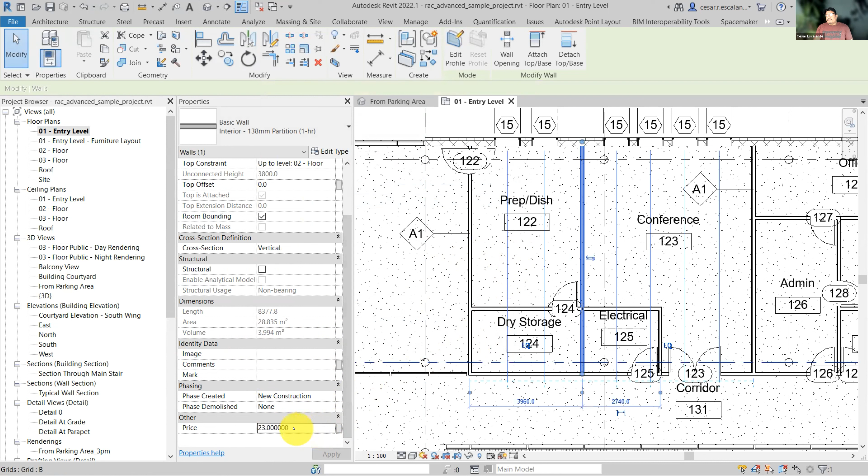Now, when I select this, the price, oh, I think I did it instance. Didn't I? Yeah, here it is. Yeah, it came with those 6. And so what's happening is that Revit will apply the global settings on numbers. And so under the project units, under Manage Project Units, where it says angle, area, cost, distance.

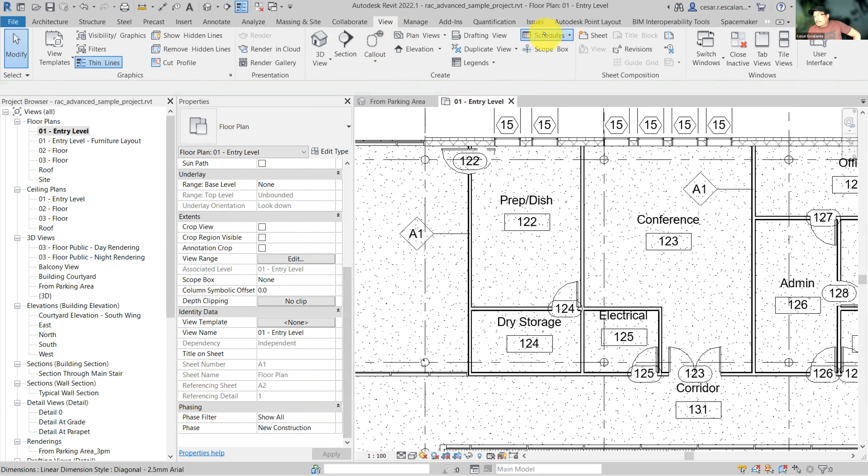I don't see just the value there, the number. All of this, so it has to do with the rounding and the rounding increments. But we can do that when we create a schedule. So in the instance property it's going to show all this. But I think when we create a new schedule of walls, for example, and we haven't looked at schedules yet, but when I add in the schedule the price,

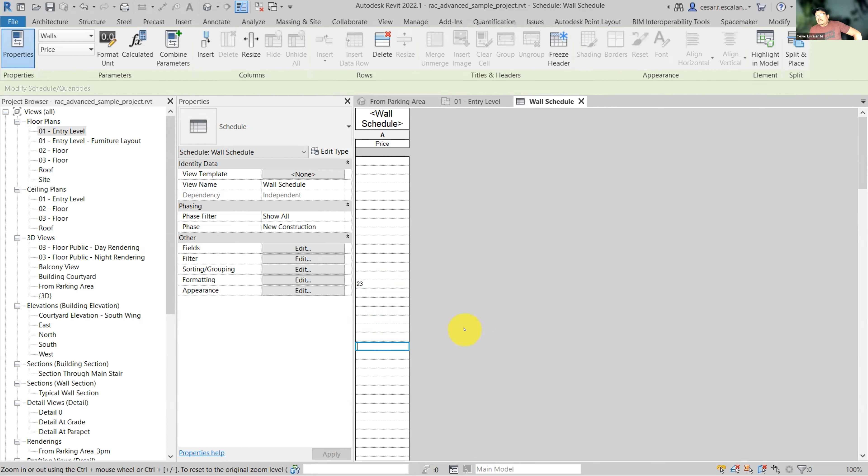yeah, when you add the price to the schedule and then you edit the parameter, so you see how all the decimals show up if it's highlighted, but it doesn't show up in the schedule. And this is something that you can override in the schedule using this Format Units. You can say fixed with 2 decimal places. And now it's only 2.

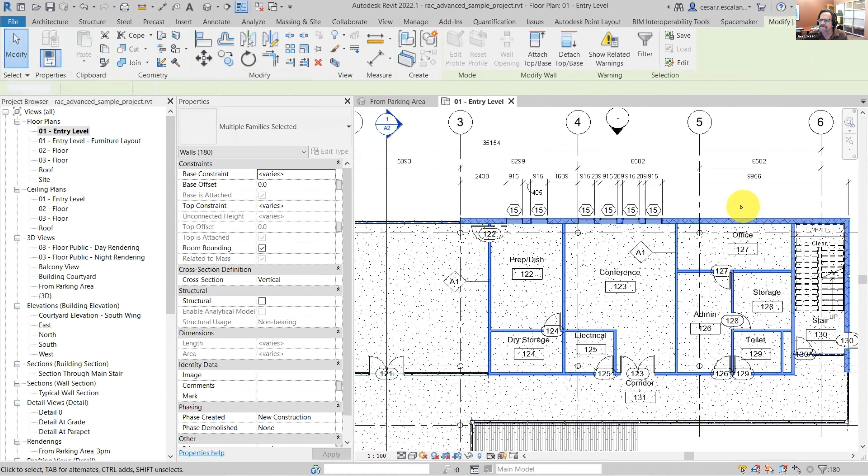So to answer your question, you can apply decimal overrides only in the schedule, but then in the properties window and the type properties it's always going to show the 6 values. Thanks. Okay, any other question?

Damn, it's 7 already. Let's do a very quick schedule, because I want to show you how to create a typical door schedule, and then next class I'm gonna show you how to create a sheet list, which is something we're always going to do, and then move the discussion into rooms.

So a schedule is a tabular representation of parameter values of objects of the same category. A schedule allows us to cherry pick parameters in an incremental order, in a sequence, and it will display the information in a table that you can place in sheets. So we're going to create a new schedule of doors.

Before we do that, let's go to the units and switch this to feet and inches, because I think the dimensions right now are in millimeters. So to change the units of a project, you go to the Manage tab and then go to Project Units. And we're going to change length to feet and fractional inches. Again, this is under the Manage tab, and then look for Project Units under Settings.

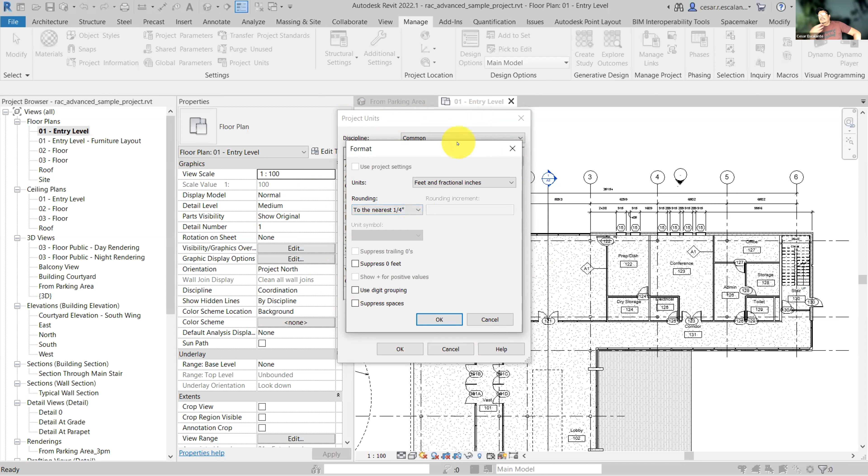And in the project units, change the length units to feet and fractional inches. Here it is. This is the global rounding of dimensions. You can leave it at the 1/2 inch default. You can leave it at 1/4 or an eighth. I guess some people might argue that a 1/4 will be fine at the detail level, or maybe an eighth. But this is the global setting. You can override it at dimension family values.

And then the areas, I'm going to change it to square feet. So area, distance, and length. Those are the ones I change. The rest I can ignore. And then hit OK. You can see now that the dimension strings change to reflect feet and inches. All right, let's build a schedule of doors, and then we close the session. Next class, I will continue with schedules.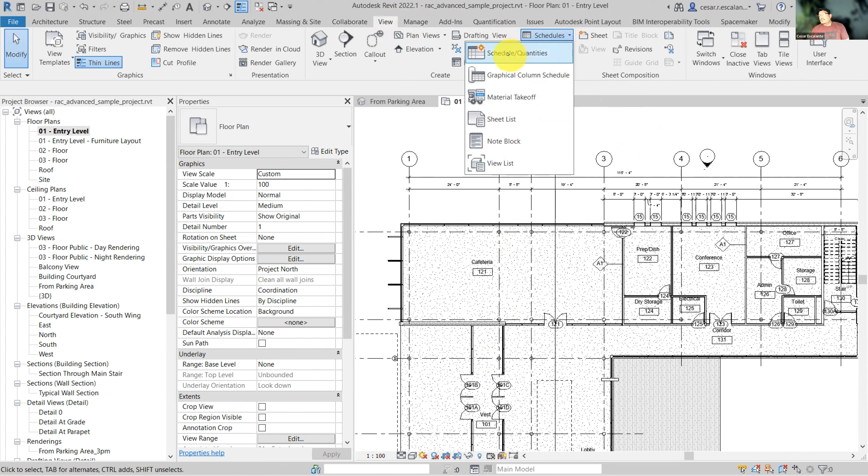So we go to the View tab, and then you hit Schedule/Quantities. There are all these different types, but we're going to do a schedule of quantities. And here you're going to pick the category of doors. You can do multi-categories. If you hit this multi-category schedule, it's going to look for parameters that are common across all the categories and display them. But that's rarely used, to be honest. What I'm going to do now is to create a door schedule.

And this is the name of the schedule. It's scheduling components associated with a phase, new construction. And then hit OK. So this is the schedule properties. It's made of all these 5 different tabs: field, filter, sort, formatting, appearance.

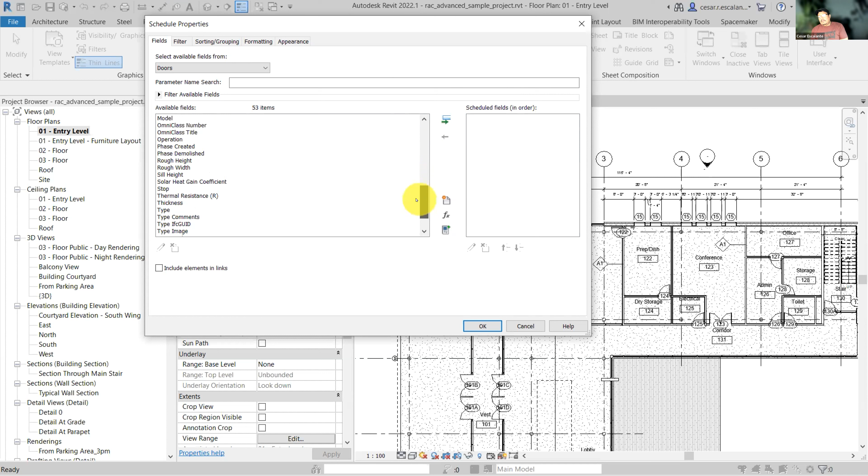And over here, you have the list of all the parameters available for the door category. In the panel on the right is the list of parameters that are going to be selected to be scheduled. So to get started, I'm going to select the width, the door width, the height, maybe the thickness. These are panel information. What else?

Information about the frame. So there is frame type, frame material. You can also schedule the panel material. I don't think there is a panel material. Oh, the mark value is the first one. Right? That's the very, very first one. The mark value is the door ID. So select the mark value and move it.

The order of these parameters from top to bottom is the way they're going to read from left to right. So you can move the parameters up and down using the move parameter arrows. So I'm going to move the mark all the way to the top because that's the very first parameter. And just to simplify this, I'm going to add the fire rating, which is a type parameter. And that should be to the bottom.

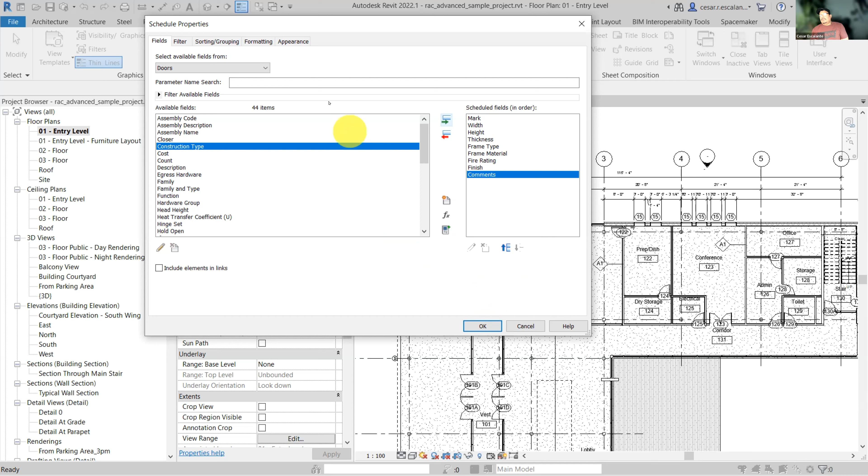The finish, the door finish. And maybe some comments. So we have mark, width, height, thickness, frame type, frame material, fire rating, finish. You can add glass type as well. I don't think we have glass here. No, there's no glass type. Okay, so just hit OK here. And this is going to create a schedule of doors.

There's a lot of information that is empty here, hasn't been filled out. But you can go into the model and add the information there, or you can just type it here directly. The information is sorted alphabetically using the first value, the mark value. Actually, that's not true. Right now it's not sorted by anything. So we need to find a way to sort this information.

In the door schedule, if you go to sorting and grouping and hit the edit button under the schedule properties, you can sort this information using the mark values. And then hit OK. And now they're sorted incrementally using the first value. Okay, so let's save this file.

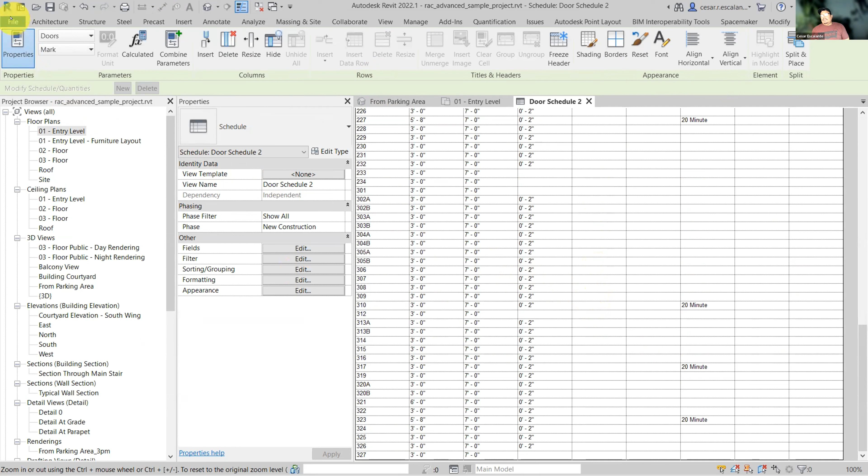And we're going to come back to this next class. I'm going to show you how to display totals, how to aggregate subtotals, how to filter information, and then how to add values in bulk. Then we're going to move into the discussion of rooms and area plans, and we'll do that on Tuesday. Okay, so again, save this file and then close it.

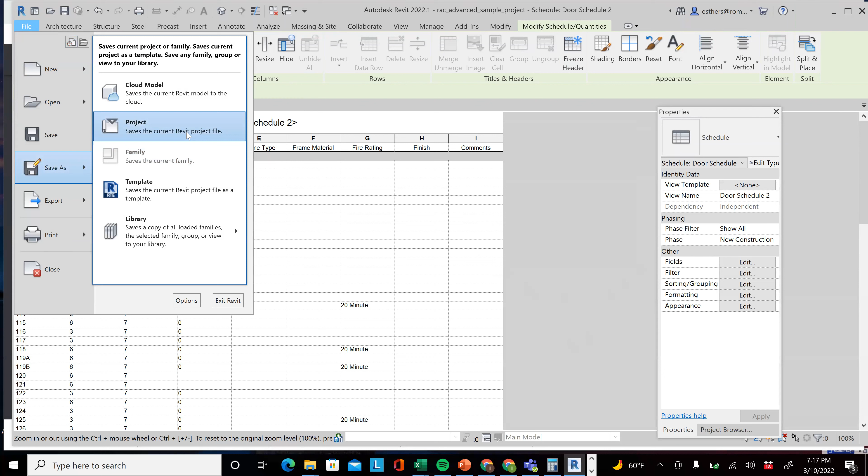And so just go File, yeah, Save As. Yeah, that's how I did it. Project, yeah. And then I just... Oh, don't do it in this folder. This is the sample folder. Do it in another folder, maybe your desktop. Here, in my downloads, here it goes. And I'm not even gonna change the name, or should I? You don't need to change the name.

Oh, yeah, now it does. Yeah, now it's working. The sample files are now read-only because Autodesk realized that people were overwriting files that were intended to be for you. So if you save it somewhere else, then it will work.

Another question. I got the properties and the project browser on top of each other, and I don't know how to decouple them. I was also trying to dock it again to the left where it was, but it's not gonna do that, it only wants to sit horizontally, which I don't like.

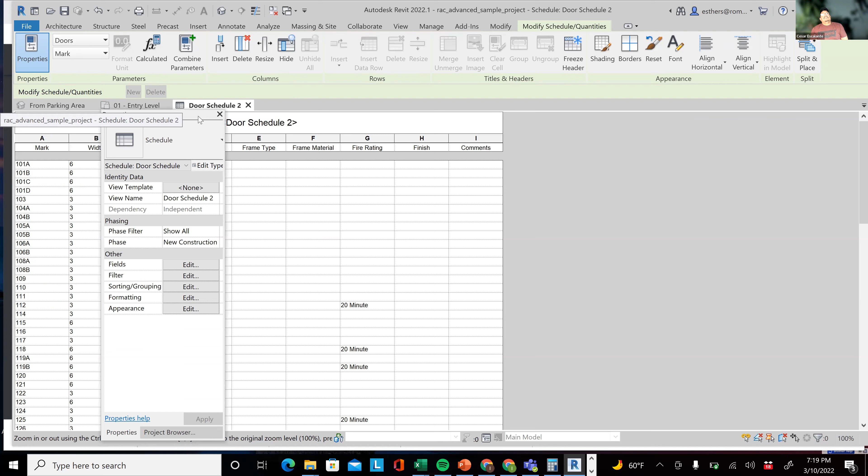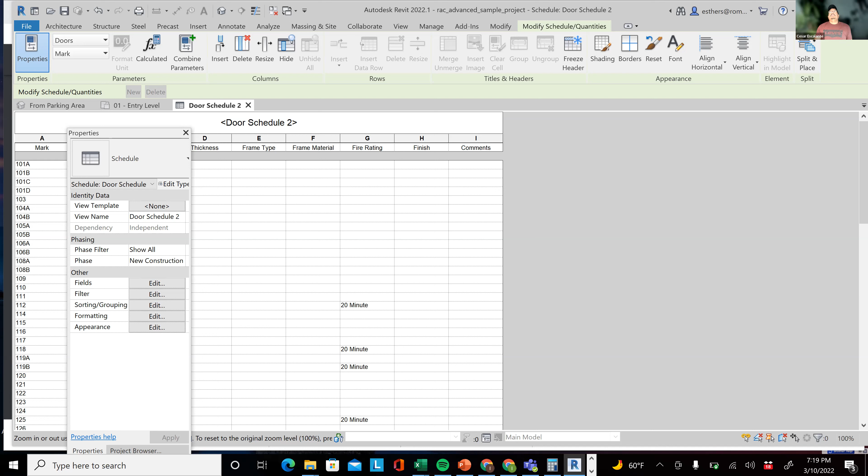Yeah, so click on the property window, that header. And then select it and drag it to the left until the cursor touches the screen edge. So drag it to the left until the cursor touches the screen edge. There you go. Doesn't want to do it. Oh, can you maximize your Revit? Yeah. Oh, that's right again.

And then slide it to the left until it touches the edge of the screen. I'm sliding it, but it's just falling off of the screen. Yeah, so click it, there you go. Oh. Do you have multiple screens? Yes. Is it showing up in the other screen? No, not at all. How weird. I'm keeping the Revit here. So you see, it wants to sit on top horizontally. Yeah. Okay.

Close the property window. And let's open it again. Go to the View tab. And then the last icon, User Interface, and then Properties. Oh, it always puts it there. How strange. Let me try this. I'm going to request remote control. I'm going to try to do it myself. Okay.

So I'm controlling your screen, I believe. Okay, so this is the cursor, and then I touch. Oh. So let me see what I did. Well, you just did what you were saying. You just touched and it worked, but it's a little finicky.

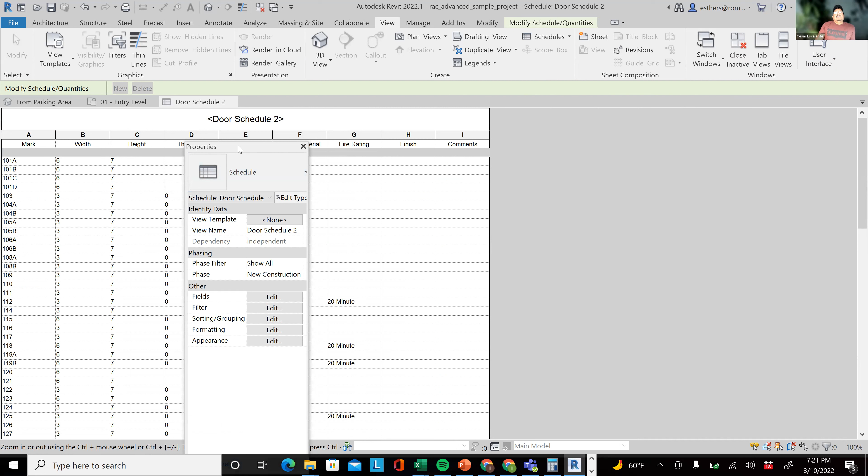So when I click on the property window header, then I slide it to the left. That's exactly what I was saying. And then do you see that blue thing that pops up? A little blue thing has to show up, and then it's gonna stack it. Okay, all right. So can I have my screen back? Yeah, view options, give up control.

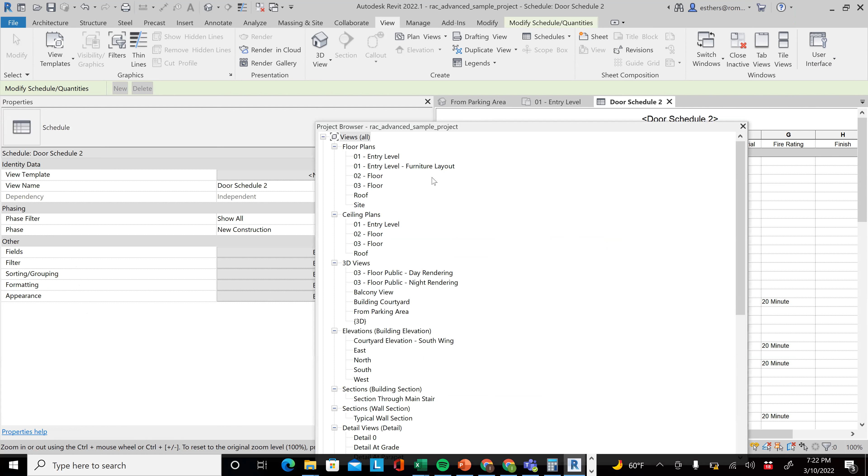Okay, so I'm gonna open the project browser, but now they're stacked. So how do I unstack them? Click on the project browser tab. Yeah, that one. Keep it pressed and drag away. And release. It's separated now. Yes, but I would like to have them one above the other, to see both of them at the same time.

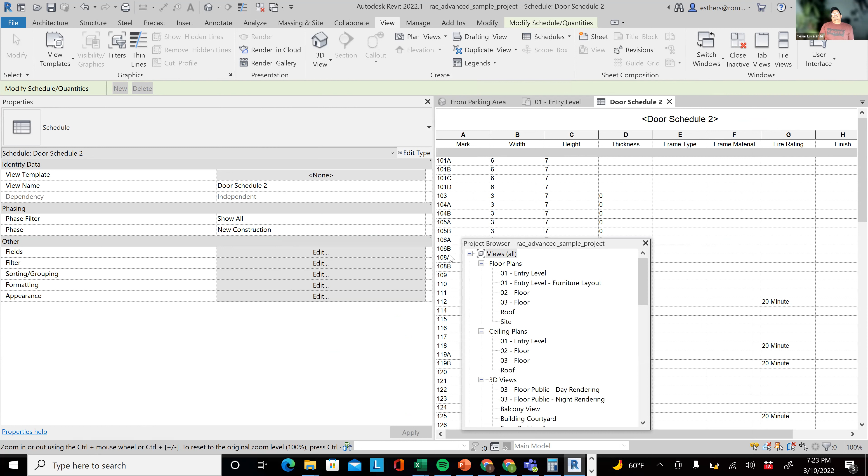So you stack the project browser to the left, just like we did with the properties. And now grab the property window from the title. Press it and move it to the project browser title. You should see a preview. It stacked again. Do you mind if I control it? No, go ahead. But this is pretty basic, I would like to know how to do it.

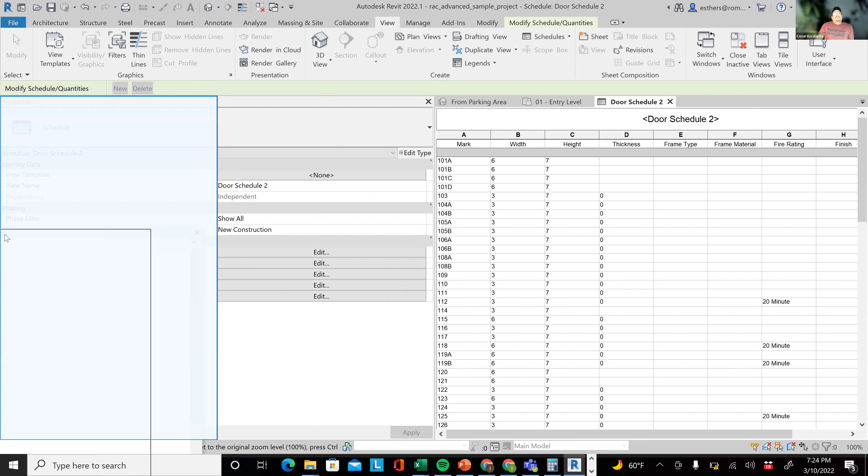Yeah, but it's really subtle. So I select this and drag out. And then I'm gonna stack this to the left. And I'm going to select the property window from the top. You see that preview? That preview is really subtle, because it could be the full thing. If it's the full thing, it's gonna stack it again.

Yes, inside. But if I move it just slightly below where I see that preview, that's where I release it and I have it on top. Yeah, great. Excellent. It's really subtle. All right.